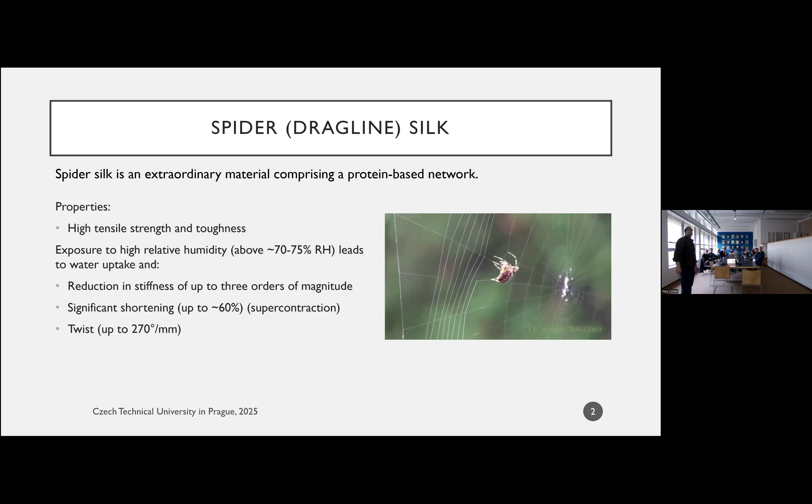Okay, anyways, so these are some experimental results. The supercontraction effect is well known. It's been investigated through and through. This is a paper that I very much like from 2006. What they've done in this work is they took a silk fiber and they measured its stiffness and its supercontraction strain as a function of relative humidity, and they've done that at 3 different temperatures. Let's focus at what happens at 20 degrees C.

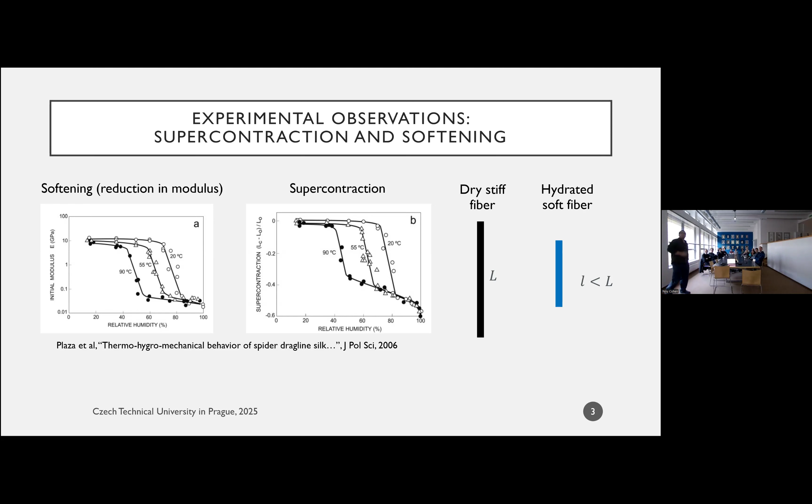So what you can see here is that as long as the ambient environment has a relative humidity of less than 75%, nothing really happens. The stiffness of the fiber is about 10 gigapascals, and the supercontraction strain is, for all intents and purposes, 0. Once I pass the 75% mark, all of a sudden the fiber begins to contract. And it doesn't contract by a little bit, it contracts by about 60%. And if you look at its stiffness, it softens from 10 gigapascals to tens of megapascals, right? So it's a very drastic reduction in stiffness. So that's the supercontraction and the softening.

And there was another paper that came out in 2019, so this is fairly recent. What the researchers did in this work is they took a silk fiber. Again, they came up with a very clever way to measure the twist. We'll talk about this in a little bit. But what you can see here, the red curve is the relative humidity. The blue curve is the twist per unit length.

And again, as long as I'm below about 60, 65, 70% relative humidity, nothing really happens. But once I pass that point, all of a sudden the fiber begins to twist, and it twists by as much as 270 degrees per millimeter. So this is a pretty significant twist. This is the same result for spider silk fiber retrieved from a different spider species. So this happens to different extents, but it happens to most of these silk fibers.

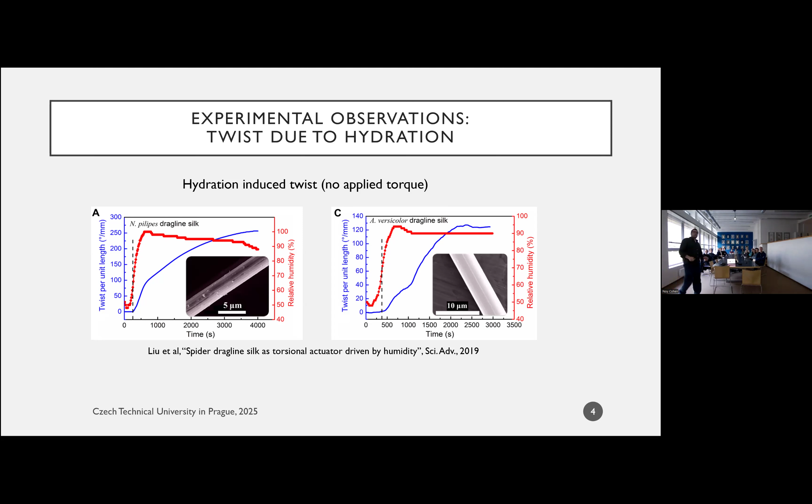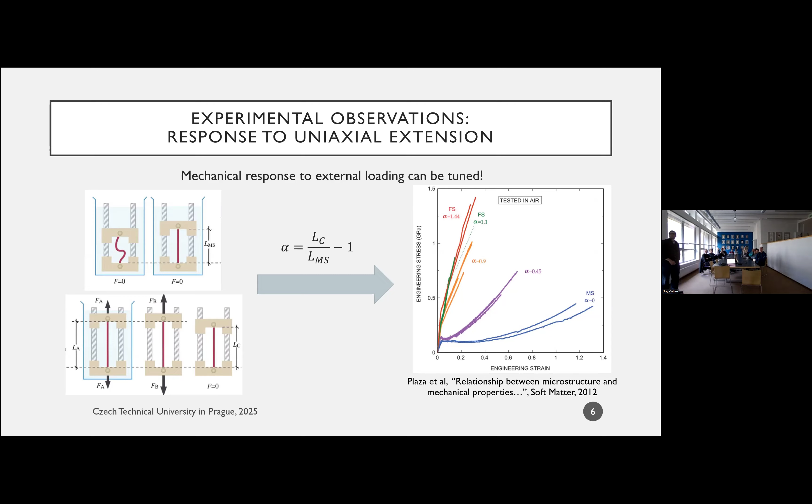Okay, and so when I looked at all of these, I'm a theorist, so we do a lot of theory in my lab. I started thinking about what kind of a microstructure do I need to have? What kind of a microstructure does the spider silk have that can explain all of these phenomena that we're seeing, right? So we're seeing a lot of counterintuitive behaviors. What is it about the microstructure that leads to this?

So if I had just a standard polymer chain and I were to put it on the table, it would immediately contract because it wants to maximize entropy or alternatively minimize free energy. So chains don't want to be stretched. And in addition, in a network, chains never want to be aligned. If there's no preference, if there's no bias, there's no reason for the chains to be aligned. Yet this microstructure still occupies this configuration, which is energetically unfavorable. And so how does this happen?

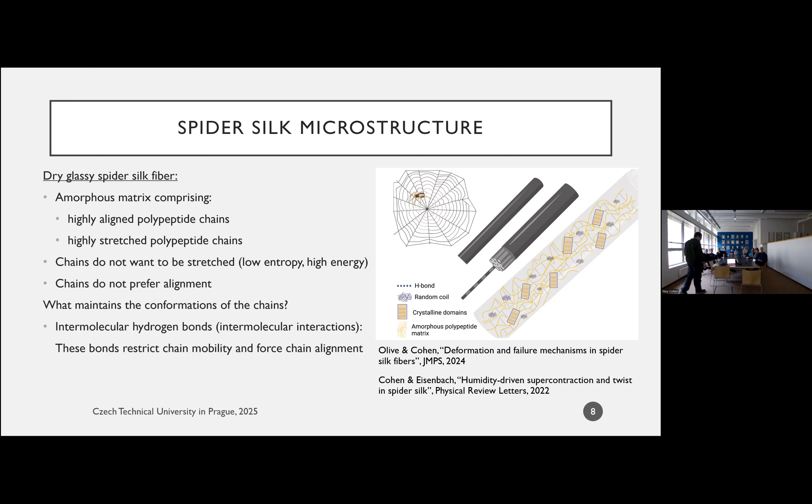Okay. What happens when water diffuses into the network? So when water diffuses into the network, the water interacts with the hydrogen bonds and it can dissociate them, it can break them. So a chain which was initially constrained with these intermolecular bonds throughout, once these bonds break, all of a sudden it's free to explore other conformations in space. It can start wobbling around, right? It can try to maximize its entropy or minimize its energy, right, under the new conditions that it's in.

And so this is kind of a cartoon to illustrate this. So say we have a chain here. Say it's a representative chain inside my silk fiber, and it's interconnected to its neighbors with, in this case, 4 intermolecular hydrogen bonds, right? When water comes in, say I broke this bond here, right? And so now all of this segment here is free to kind of move around. It's free to wobble, to explore other conformations. And because of that, we get the supercontraction effect. Right? Because of that, the chain can now contract. It can shorten, and we start seeing contraction on the macro scale.

In addition, if I remove these constraints, chains are no longer restricted to orientation. They can now explore other orientations in space. They can start moving around and exploring different orientations in space, which means I'm ruining the alignment, right? I'm destroying the alignment. And so ultimately, when I've broken all of the bonds, I'm going to end up with a network that very much resembles a rubbery network with chains that are randomly oriented and uniformly distributed. And all of the chains are essentially random coils. There's nothing that restricts them. They can maximize their entropy in whatever way they want.

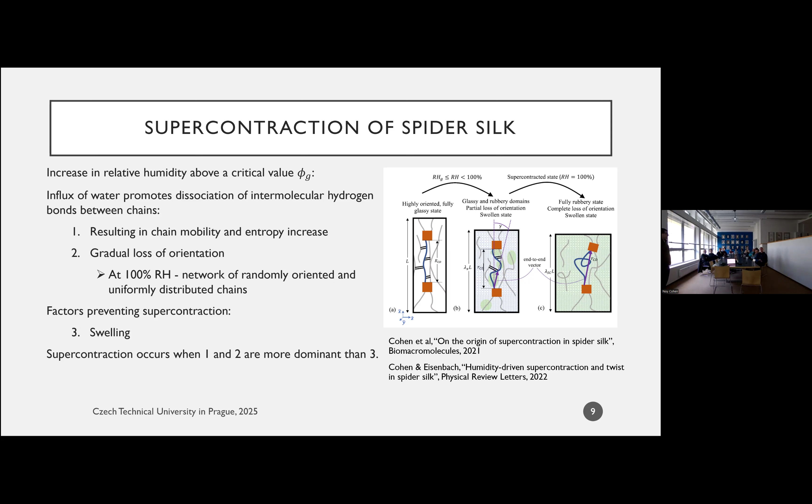Okay. And so after we had this picture in mind, we said, all right, great. For all intents and purposes, this is a polymer, right? It's just made of polypeptide chains, but it's a polymer. And so let's see if we can use the standard polymer theories to capture this effect. And so to do this, well, I'll show you what I've done, but before that, I wasn't really sure how familiar you are with polymer physics.

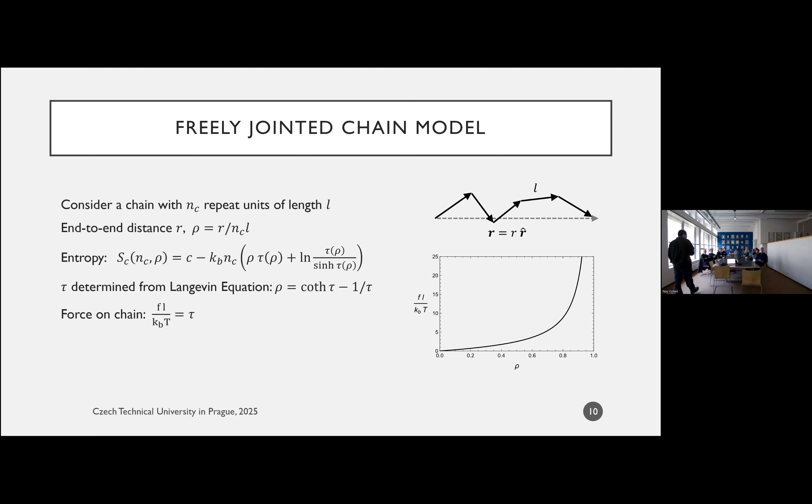And again, this is the same response in rubbers, right? So if you take a rubber, you start stretching it, it's soft. The more you stretch it, the more it stiffens, right? So this is the classical response of rubbers. If we want to use this theory to characterize the response of silk fibers, though, we've got to remember that silk fibers have a very different behavior.

And so silk fibers, if I want to take this and find the analog, have a different microstructure inherently. So they start out in a glassy state. I'm saying glassy in the sense that the chain itself has no conformational freedom. Chains start out as a polypeptide segment that has pretty much no conformational freedom. It can't move around and maximize entropy.

It's fixed. When water diffuses into the network, all of a sudden the chain starts to gain mobility, right? It starts to get these freely jointed segments along the chain that can occupy different conformations. And so the chain can start moving around, and then ultimately, when enough water diffused into the network, I end up with just a random coil, or something that resembles a random coil.

And so, if we want to model this using the classical polymer physics theory, we have to somehow input all of this information into a model. And so that is what we've done. To model the response of an individual chain, let's look at a chain that is initially highly aligned. It interacts with its neighboring chains through, say, capital M intermolecular bonds.

Then we propose a relation that tells me how many bonds the average chain has with its neighboring chains. And that's a function of the relative humidity, and it depends on the strength of the hydrogen bonds, or how much energy I need to break the hydrogen bonds. And from this, I can compute the average number of repeat units, and I can compute the entropy.

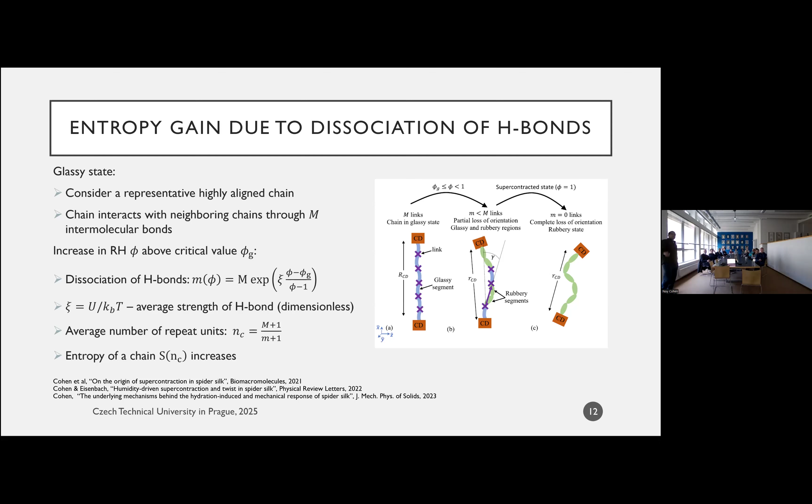Okay, so there's a lot of calculations here that I didn't put in, but it's all in the paper, and I'm happy to talk about that after. So once we have all of this, we can compute the entropy of a chain. We also said that the network is highly aligned, and the alignment gets lost as water diffuses into the network. And so how does that work?

To capture this, we define a parameter we'll call a degree of orientation. This parameter is a function of the relative humidity, such that below some critical relative humidity, chains have no entropic freedom and are pretty much fixed in space, so their orientation is highly aligned. But the more water comes in, the more the chains get disoriented and gain mobility, and the alignment gets lost until we end up with a material that's randomly oriented.

Once we had this, we defined the volume fraction of water molecules. We were able to compute the volumetric deformation, the stress, the stretch of a chain, the fiber stretch, pretty much everything. And then all we had to do was run the calculations and see if this model fits the experimental results. I should also point out, if you take the appropriate limits here, you can come up with an expression for the Young's modulus. So this is the expression that we got. It's long.

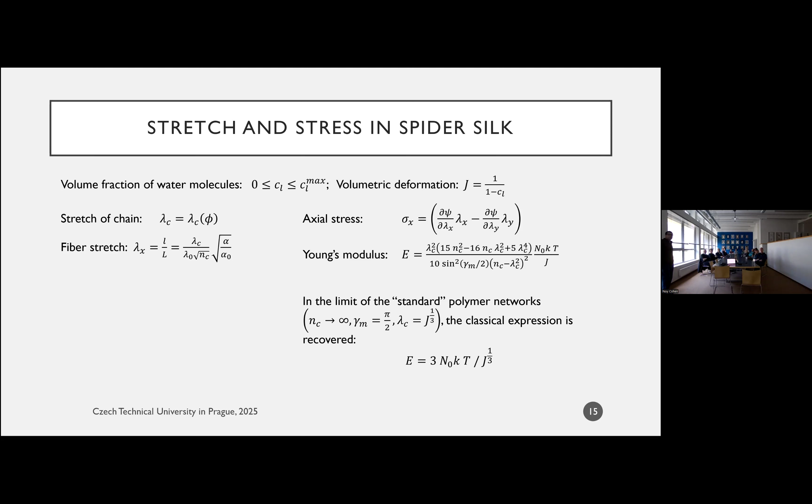But I'll show you it works reasonably well. And I should also point out that again, if you take the appropriate limits here, this recovers the well-known theories of swelling that have been published out there, right? So we're not breaking any math. We were just modifying the existing theories.

And so after we had this, we had all of the necessary information. We could go ahead and start comparing this to experimental findings. And so that's what we've done. So what you see here, this is the supercontraction stretch. This is the stiffness as a function of relative humidity. The dots are the experimental results. The curves are the model. And you can see that the model does a pretty good job at fitting this.

Now, I should also point out, in the model itself, all of the parameters are physically motivated, right? So we don't have the classical fitting parameters. We don't have numbers that we could just kind of throw in there to make it fit. All of the model parameters are grounded in some physical quantity. So for example, in the model itself, I need to input the dissociation energy of a hydrogen bond. Now, people have actually quantified this using MD simulations.

So there was a paper in 2011 that looked at the energetics of hydrogen bonds in peptide groups. And what they found is that the dissociation energy of hydrogen bonds in a peptide group should range somewhere in the area of 5 to 10 kT, right? So this is kind of the limit that we have to play around with. In addition, if you stretch the fiber to failure, you could look at the maximum extension, and based off of that, you can estimate the number of freely jointed segments. So we've done that as well.

The maximum volume fraction of water, that's also a quantity that we can estimate, right? So we had a lot of estimations here to kind of see what these numbers that we plug in need to be. So after we had this, we saw that this worked out pretty well. We compared it to other experimental findings, which I'm not showing here.

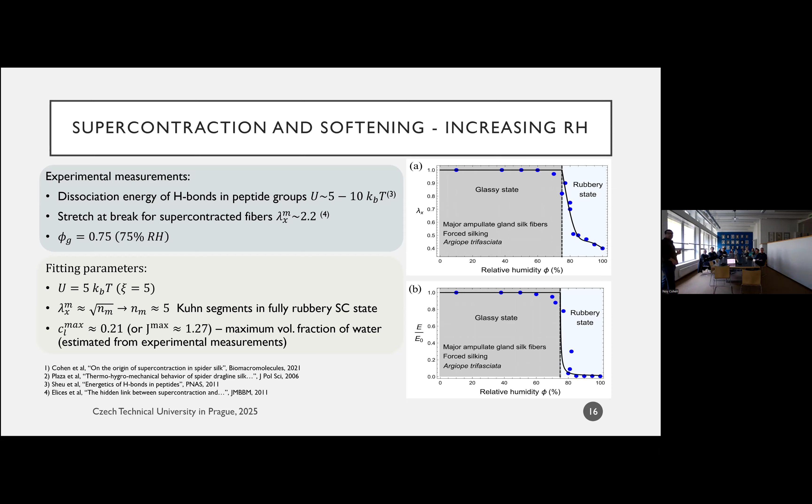So one of the things we said is, if we know that the chain starts out as highly stretched, and as water diffuses into the network, it contracts, let's try to track its contraction. Let's see what the end-to-end distance is. Let's see how much it contracts. And so this is one of the simulations that we ran with the model that we had. And what you see is that as long as you're below the critical relative humidity, pretty much nothing happens. Once you pass the critical relative humidity, the two ends of the chains come closer to each other, right? So the end-to-end distance decreases.

And it turns out that a little above 85% relative humidity, the chain starts to stretch a little bit, right? So this was a bit surprising. And it turns out that the reason why we get this stretching here is due to swelling. So in the classical swelling of gels, if I have a gel and it swells, typically the chains in the gel have to stretch to make room for the water molecules, to accommodate the water molecules that diffuse in.

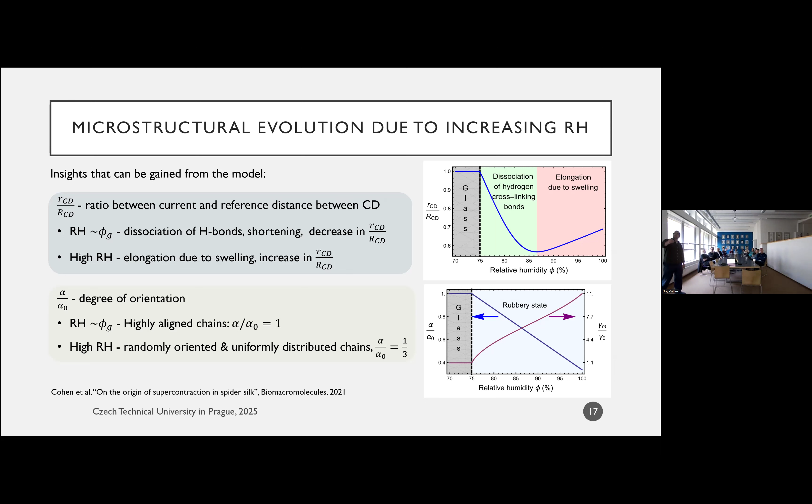In this region here, I don't have to accommodate them because I'm relieving the constraints on the chains, right? And so I get loss of orientation, I get dilation, but the chain itself contracts. Once I get to this point, I've broken most of the intermolecular bonds that restrict the mobility of the chain. And now the chain starts to stretch a little bit to make room for the water. And we also did a very similar analysis with the orientation, and we can measure how the orientation gets lost. Okay, so based off of this, I hope I've convinced you, we kind of understand why supercontraction happens.

So after we published this work, we said, we know that these fibers also twist, right? So why do they twist? Again, this is a counterintuitive response. Keep in mind, I have a system, water diffuses into it, and it starts to twist. Why would this happen, right? So this is not a trivial effect. And so to understand this, again, we started reading and looking at the microstructure of this silk fiber.

And to understand why this happens, after a lot of thought, we decided that it would be wise to distinguish between different length scales to kind of understand the twist response. And so let me show you what we came up with.

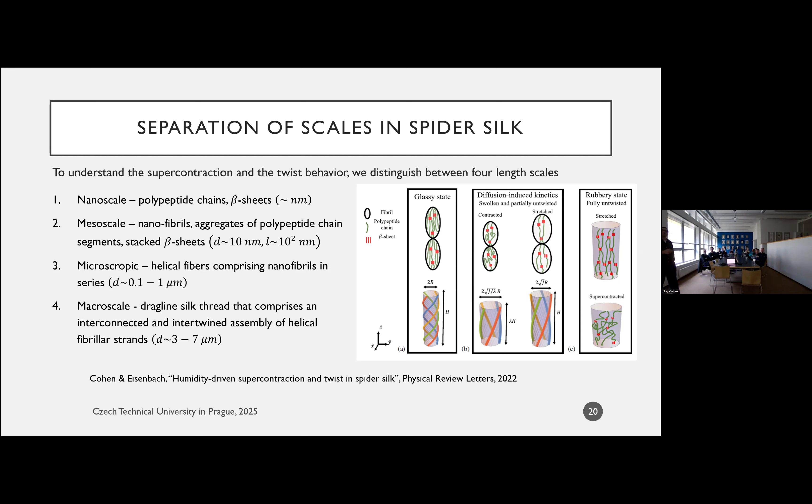Now, in the glassy state, we have these helically intertwined fibrillar strands, and keep in mind, this is not an energetically favorable configuration, right? The fiber itself doesn't want to be in this configuration because there's energy that's required in maintaining this. And so the way this is maintained is again by these intermolecular bonds. These intermolecular bonds are key to understanding what happens here. They kind of fix the whole structure in space.

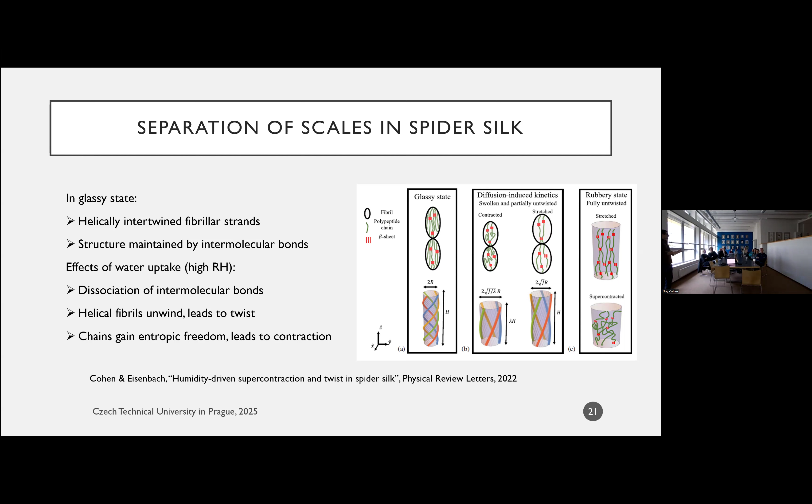Once water diffuses into the network, basically the water dissociates the intermolecular bonds. And once these bonds go, nothing maintains this structure. And so the structure begins to unwind, and that unwinding on the macro scale, we see as twist. And chains get entropic freedom. And the entropic freedom, we see as supercontraction. Right, so these are the two phenomena that we're seeing. So as you can kind of tell, these two happen on different length scales.

So basically, if we're thinking again about these length scales, if I want to understand supercontraction, I can shrink myself down to a nanometer scale. I could sit on one of these polypeptide chains, and I'll see the whole environment around me shrinking, right? Because it's an effect that happens at these scales. So no matter where I am, I'm going to see a contraction of my environment.

However, if I want to see twist, I can't sit on a polypeptide chain. I have to kind of make myself bigger, and I have to look at the helical features. I have to be at an order of magnitude that allows me to see the helical features in the fiber. And only then will I see the surrounding twists.

Okay. And so once we have this understanding, we said, all right, we need to model this somehow, right? We need to quantify this somehow so we can say something. And so the way we model this is by doing the following. This is more of a continuum mechanics-based approach. What we said is let's define three configurations. We'll define a dry glassy state, a hydrated traction-free state, and a hydrated loaded state, right? So these are the three states that I have.

And in each of these states, I'm going to quantify the helical feature, the number of turns that I have per unit length on average, as alpha naught, alpha SC, and alpha, right? So alpha SC is basically alpha supercontraction, or the number of twists that I have per unit length in the supercontracted state.

Now keep in mind, the challenge here is that the traction-free state keeps changing. So this is very similar to problems with growth, right, where you have a traction-free state that keeps changing. And I have to somehow account for the fact that the traction-free state changes, this time not with time, but with hydration.

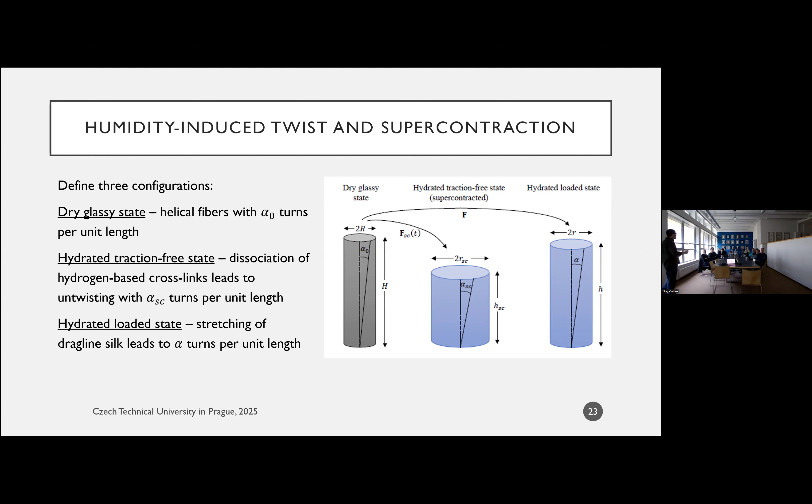And so this is the mapping, right? You can quantify, so this is fairly straightforward. So this is the mapping, the deformation gradient from the glassy state to the traction-free state. This is the mapping from the glassy state to the hydrated loaded state. And once I know the deformation gradients, I can compute the overall deformation gradient from a traction-free state to a loaded state, right? So I can do all of these.

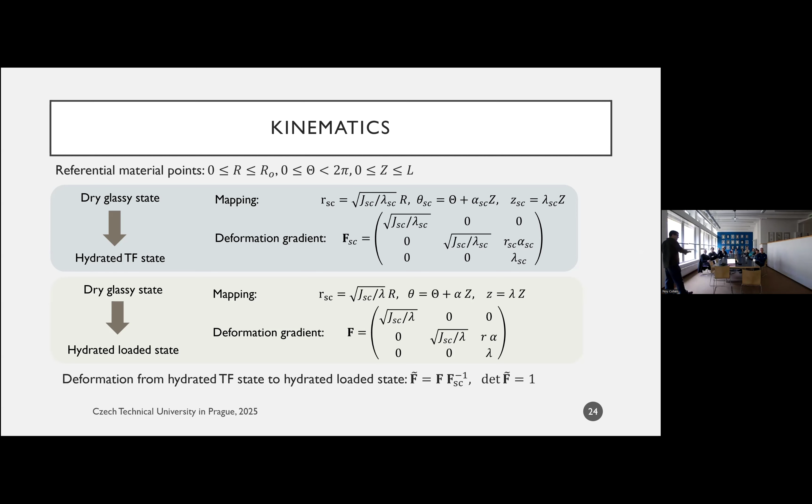And once I have this, if I want to get an expression for the stresses, if I want to be able to solve a boundary value problem, I need a constitutive relation. And so that's the next thing we've done. Now, again, the challenge here goes back to the fact that the traction-free state keeps changing. We have to account for this somehow, right? If I take this fiber and I put it in water, it's going to change its conformation, even though there's no mechanical forces being applied.

In the case of a traction-free setting, where I just take this fiber and I subject it to humidity, then the stretch is just a supercontraction stretch, and the twist is just a supercontraction twist. And if I want to be able to compare this to experimental findings, I need to prescribe relations for lambda SC and alpha SC. And so that's the next thing we went ahead and did.

And so the whole process itself is governed by diffusion. If it's governed by diffusion, the amount of water that I have in the silk network should scale as the square root of t, give or take, right? So the experiments actually support the square root of t. This is kind of a hallmark of diffusion. And so the K here accounts for the diffusion coefficient, the geometry, and all of the diffusion-related parameters.

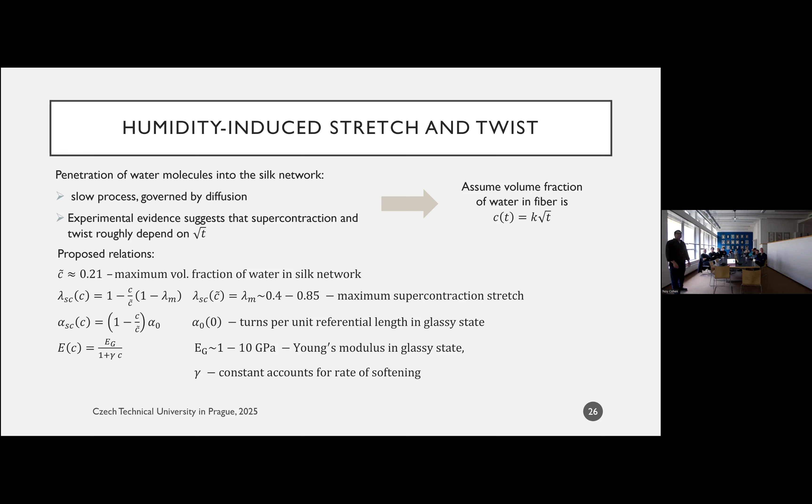And after we had this, we said, okay, so now the supercontraction stretch should look something like this. We assume that it scales linearly with the amount of water in the fiber. The supercontraction twist also scales linearly with the amount of water in the fiber. And the Young's modulus scales inversely proportional to the amount of water. And once we had this in mind, we were able to talk about boundary value problems, right? Now we have everything we need, so we can define a boundary value problem.

So we have this fiber, the fiber is subjected to torsion and a force, or no torsion and no force, or it's subjected to a stretch, right? So whatever we want, we can define it in this way. And we have an expression that relates the force to the stretch, and the torque to the twist, right? IP here is the polar moment of inertia.

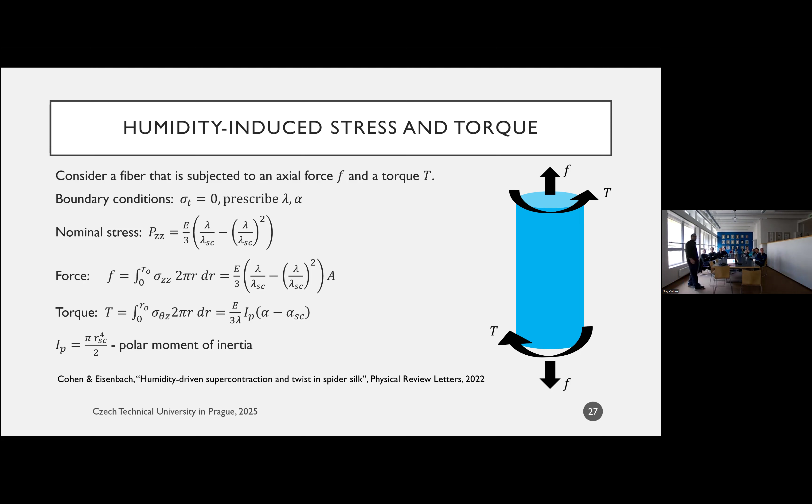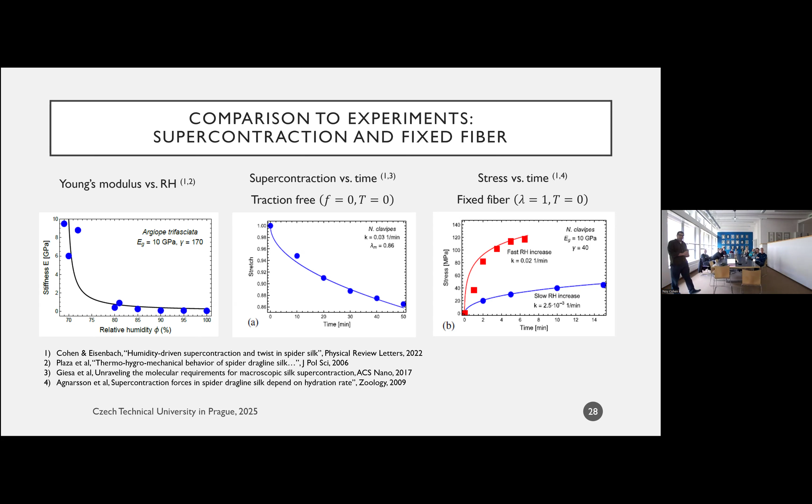But the whole reason we came up with this problem was to characterize the twist. And so the next thing is let's characterize the twist. So before I characterize the twist, I have to tell you how they measure the twist. So keep in mind, this is a fiber. The fiber itself has a diameter of micrometers. So it's not like you can draw a line on it and measure how much it twists, right? It's very difficult to see how to actually measure the fact that the fiber twists, just because of the scale

of the system. And so in 2017, there was a paper that came out with a pretty clever design of how to measure the twist in these fibers. What they've done is they said, I know the fiber is extremely small. It has a very small radius of micrometers. I'm not going to be able to see twist, right? I don't have the scale to see the twist.

And so what they've done is they said, we'll take the fiber, we'll hang a paddle at the bottom, right? So there was a paddle that weighs about 0.1 grams. It's much heavier than the fiber. And what we're going to do is we're going to increase relative humidity, and we're going to measure how much the paddle twists, right? And based off of the twist of the paddle, we'll be able to say how much the fiber twisted. It's a pretty clever setup.

But it does force us to think about the boundary conditions of this problem, right? Because now we have a fiber, the fiber is under a dead load, and we are increasing relative humidity. And so the force is roughly 1 millinewton. The torque is 0. There's no torque that's being applied. And the nominal stress, or the dead weight stress, is something along the range of 10 to 100 megapascals. It really depends on the radius, and different fibers have different radii, right? So it could be 3 micrometers or it could be 7 micrometers. It could be 10, right?

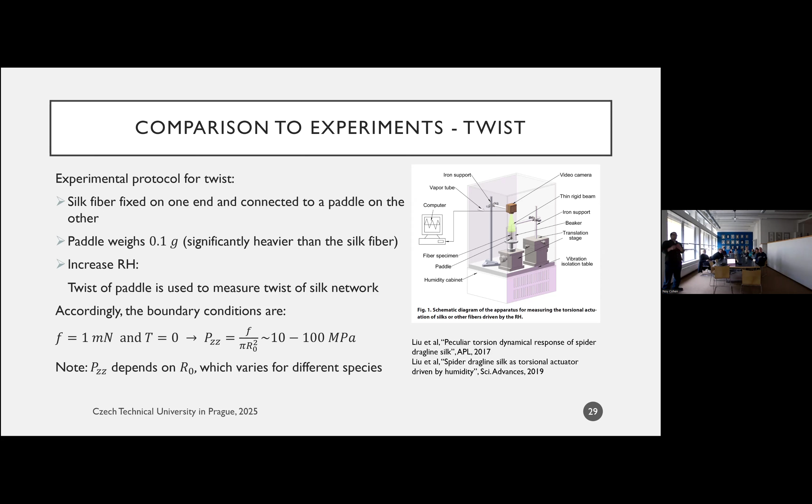And so once we had this, we said, okay, now we understand what's going on. Let's compare. And so we compared it to the experimental findings. What you see here is the twist per unit length as a function of time for the different fibers that we took, right? So these are 2 different fibers. We can see that the model captures the overall trend. This is a bit of a mishap, which I still don't understand why this happens, but overall we fit the trend pretty well.

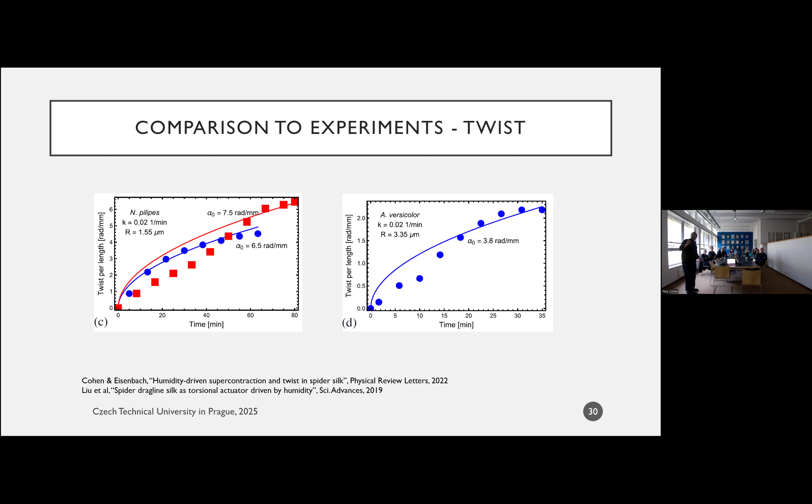And when we submitted this to PRL, we submitted just like this. And then the reviewer asked us, it turns out that the people who conducted the experiments also measured an elongation of the fiber, right? So they had this silk fiber, there was a paddle on it, and it turns out that as the water diffuses into the fiber, we would expect it to supercontract, but it didn't supercontract. It elongated by about 1.5%. And so that forced us to think a little bit: why is it stretching, right?

It shouldn't be stretching. And it turns out that the reason why they measured an elongation is because when water diffuses into the fiber, it wants to supercontract, but it also softens. And there's a weight that's attached to it. And that weight, if the fiber is very stiff, is going to do very little. But if the fiber is very soft, it's going to do a lot, right? And so because of the softening effect, we still end up seeing some sort of a minor extension here.

And so this kind of forced us to think about this. But after we thought about it, we said, let's plug this into the model and see if our model captures this, because we didn't look at the longitudinal elongation until then. And it turns out that our model does a decent job, right? It does capture some sort of an elongation here.

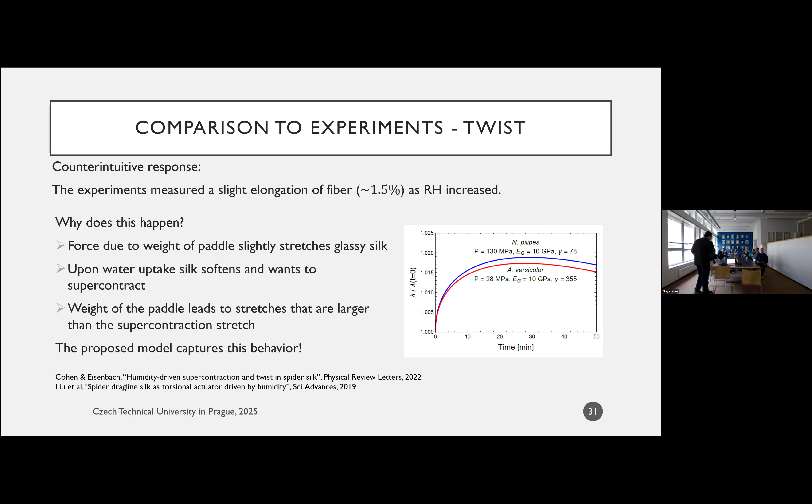You can see here, this is a function of time. We see that the fiber elongates, and the elongation itself is because there is a dead weight, and the softening is much stronger, if you will, than the supercontraction, right? Or the change in stiffness is much more dominant than the supercontraction effect. Okay, so after we had this, we figured, great, now we can understand the twist response.

But still, these silk fibers, if I'm going to talk about fibers, typically I'm going to subject them to uniaxial extension. And in fact, I saw the crane exhibit that you have outside, and all of the cranes that I've seen, they took wires, right? They took strings, ropes, to kind of reinforce the structure. So if I'm going to use fibers, I'm probably going to test them under uniaxial extension. And so if I want to understand the uniaxial extension response here, the first thing I have to do is look at the trends. What's happening? If I take a silk fiber and I stretch it, what does it behave like? What does it look like?

And so it turns out that when you start stretching the fiber, you get what we call an elastic region or a linear region, right? So you stretch it initially, there's a linear regime. After the linear regime, it reaches some sort of a yield stress point, and after the yield stress, there's a plateau, there's like a softening effect. And then after the softening, there's the classical stiffening, right? So it stiffens. This is very typical of glassy polymers. But I would argue that the mechanisms here are different than the glassy polymers. And so the question is, why is it that this is the trend that we're seeing? How do we understand this trend?

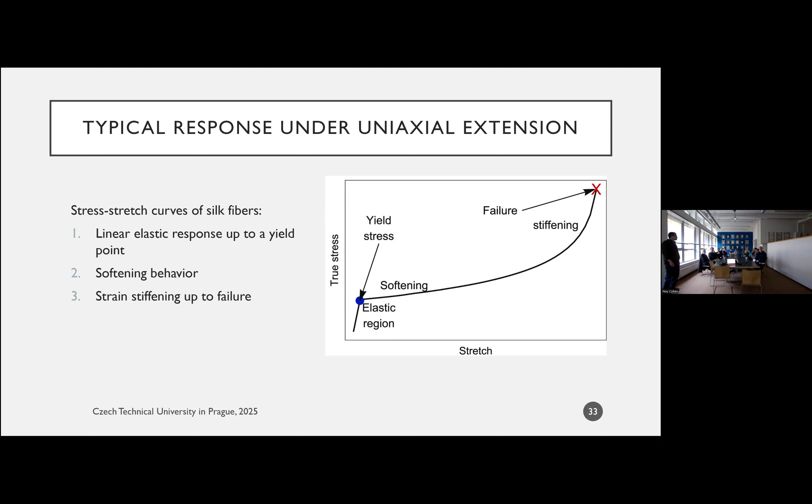So after we have kind of an idea of what the microstructure here looks like, I would argue that when we have this spider silk fiber, and we start stretching it, the initial displacement, the chains have very, very little mobility. Chains cannot give me deformation, they're constrained, right? So there's very little that they can actually do. And so when I start stretching the fiber, the way I get deformation is by the distortion of the intermolecular bond. Or in other words, chains can slide past each other.

So say I have two chains, and then I start stretching on the macro scale, what's going to happen is these two chains are going to slide past each other because they don't have a lot of mobility. They can't really move around and give us deformation. So they slide past each other. But in order to slide past each other, there is a cost. The cost is they have to distort the intermolecular bonds that connect them. So they slide past each other a little bit, and the bonds themselves start to distort, right? So I get a distortion of these bonds.

When I reach the yield stress, what happens is that all of a sudden, all of these bonds have reached the maximum stress they can carry, and then they break. And once these intermolecular bonds break, all of the external load gets transferred to the chains. So this is a pretty weird situation. We have chains that initially feel very little force, right? When I start stretching it, the chains don't feel a lot of force because all of the force is carried by the intermolecular bonds. Once these intermolecular bonds break, all of the external load gets transferred immediately to the chain. And now a chain which was initially under very little force, all of a sudden feels this huge force. Because of this, chains extend, right? So that gives us this kind of softening or jump type effect.

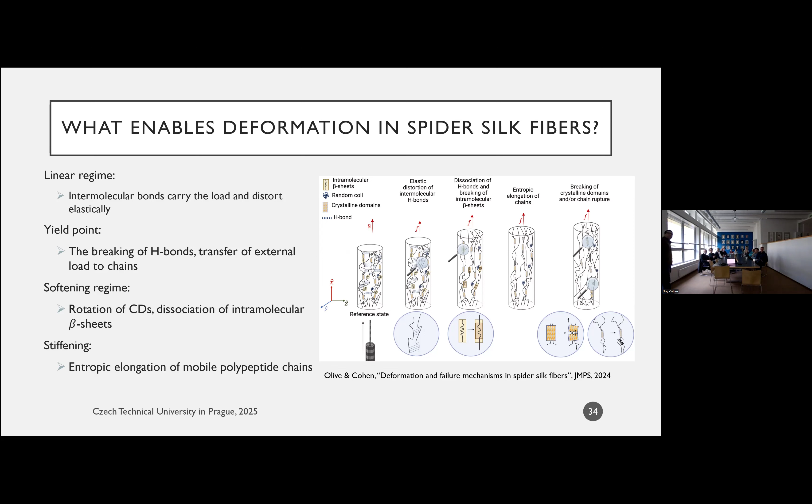I get entropic stiffening, right? What we call entropic stiffening. I stretch the chains and they stiffen, and I have to again fight against entropy. And so once we had this picture in mind, we said, wonderful. Let's try the, okay, sorry.

And so again, I want to remind you of this experiment that we saw in the first slide before I go into how we model this. This is one of the experiments that led me to start thinking about this problem. What people have done here is they found some sort of a post-processing that you could do to a silk fiber. They say if I have a silk fiber, I put it in water, I let it super contract, then I dehydrate it under tension.

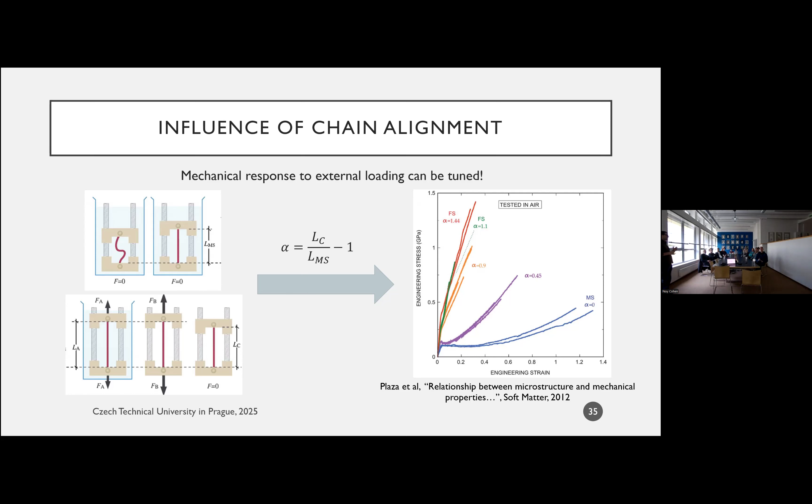And based off of how much I pre-stretch it before I dehydrate it, I can control its properties. So you can see here that I can get fibers with a wide variety of properties. This all comes out from the same fiber, right? It's the same fiber, just a different post-treatment. And so this was the main motivation: let's understand why this happened. And so to model this, the first thing we had to do was to talk about the orientation of the chains.

So essentially, if I have just a silk fiber that the spider gave me, then the chains in this fiber are highly aligned. There's a very distinct ordering of the chains, right? When I put it in water, I break these intermolecular bonds. All of the chains start to gain entropic freedom. They start moving around, they gain mobility, and the order gets lost. And I end up with a structure with chains that are randomly oriented and uniformly distributed.

If I stretch it and then let it dehydrate, what I'm doing is I'm forcing the structure to find its equilibrium. I'm forcing the intermolecular bonds to form in a situation in which the chains are more stretched. So basically, I'm controlling the alignment of the network.

And so to model this, we said, let's define a distribution function. We'll call it rho here, and I'll show you the explicit formulation later on, but this is just as a general sense. We need some sort of an orientation function that relates the angle between a chain and the end-to-end distance, the probability of having a chain at a specific orientation to the fiber direction. And this distribution function also needs to be a function of the process: how much did we pre-stretch while we dehydrated?

And so this is the probability density function. We defined it, and it has to satisfy the state in which if it's completely super contracted, then there's no ordering in the system. The next thing we wanted to do is to model what we call the elastic regime. How does this fiber stretch?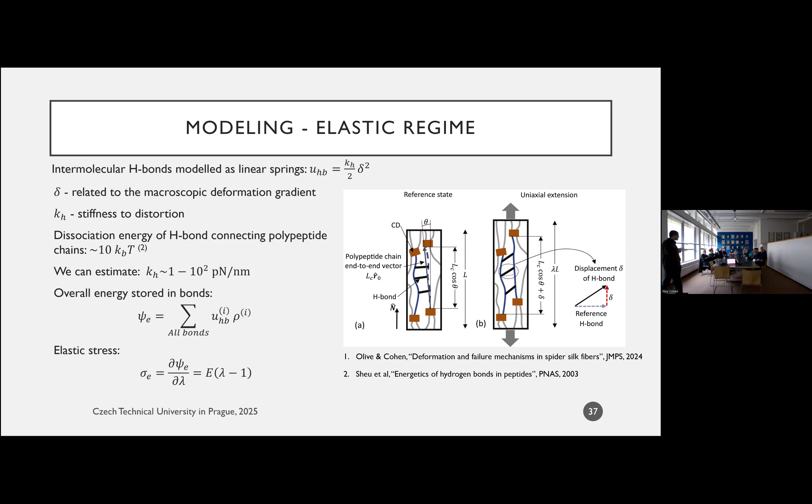After we do this, we can compute the energy of the bonds, and then if we differentiate that, we end up with the elastic stress. So that gives us an idea of what the elastic stress looks like, and tells us something about the elastic regime. To capture the softening and the stiffening regime, we said, okay, so this is the typical chain, right?

The typical chain would look something like this. These are stacked beta sheets. These are crystalline domains that nothing will happen to. They're very, very stiff. So this is not one beta sheet, but they're stacked. It's a very strong structure.

Inside the chain, there's some evidence. There were papers that reported that there are intramolecular beta sheets. So these are structures that are much weaker. It's a beta sheet, but it's kind of like having a string and you rope it around itself and you interconnect them with a very soft bond. And once the intermolecular bonds break, these chains begin to feel a very strong stretch, very strong force. And because of this force, this structure breaks and the chain elongates, right? So we get this elongation.

So if you look at the force displacement curve for a single chain here, it would look something like this. You would have a certain Langevin response or the typical response up to a certain force. At this force, the contour length increases. So you get a jump in the end-to-end distance because the contour length increased. You relieve some of this hidden length. And then you just have entropic stiffening. And so once you do this, again, it's very easy and straightforward to compute the macroscopic response.

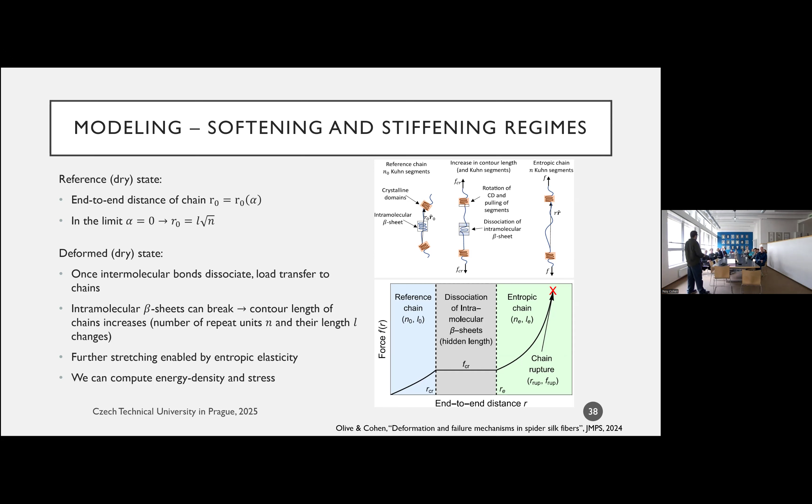And so the way we've done this is we came up with an algorithm. It took a while, right? But it's an algorithm that enables us to track what happens to the individual chains and integrate over the structure in order to get the macroscopic response. And so once we had this, we figured, right, now we have everything. Let's compare to experimental findings to see if this model works.

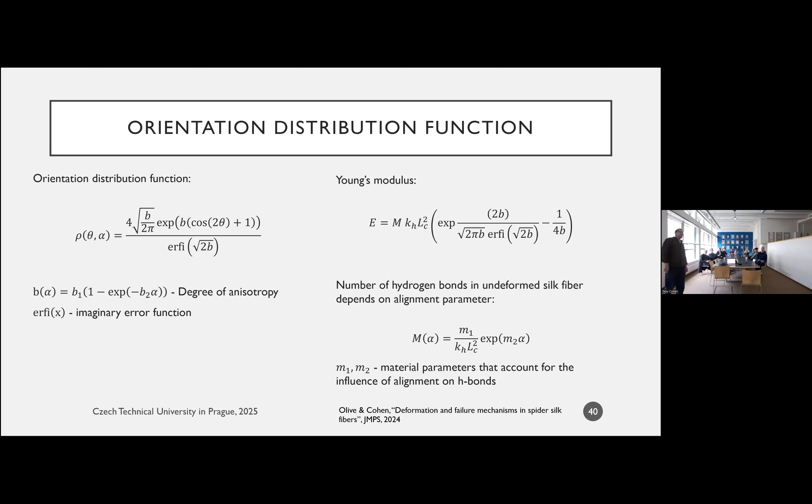Okay, and so before we can actually compare it, this is the orientation distribution function that we took. Run through the math, you can find out that this is what the Young's modulus looks like. This is what we assume would be the dependence of the number of intermolecular bonds as a function of the alignment parameter. And once we had all of these, we said that's perfect. Let's compare. So what you see here is the stiffness as a function of the alignment parameter, right? This is the stiffness for a fiber that's super contracted.

So if I have a fiber, I put it in water, I take it out, I let it dry without applying any force. I stretch it, I measure its stiffness. This is its stiffness. Keep in mind, in this state, the microstructure of the fiber is just randomly oriented. There's no orientation in the fiber itself, right? So it's randomly oriented, and that is why it's relatively soft. Again, this is in gigapascals.

If I take this fiber in water and then I stretch it and I let it dehydrate under tension, now I've forced a certain ordering in the material, which means that once it's completely dry, I expect to have a fiber that's much stiffer. And it turns out that it is much stiffer, right? So these different curves are for different spider species. I'm never going to be able to say the names of these, so I'm not even trying. But you can see our model works pretty well with all of them, so we can understand what happens to the different fibers.

In addition, what I'm plotting here is the number of intermolecular bonds that formed between chains as a function of the alignment parameter. And what I'm arguing is that the more I pre-stretch the material and let it dehydrate under tension, the more bonds are going to form, because I need more agents or bonds to counteract the entropic effects.

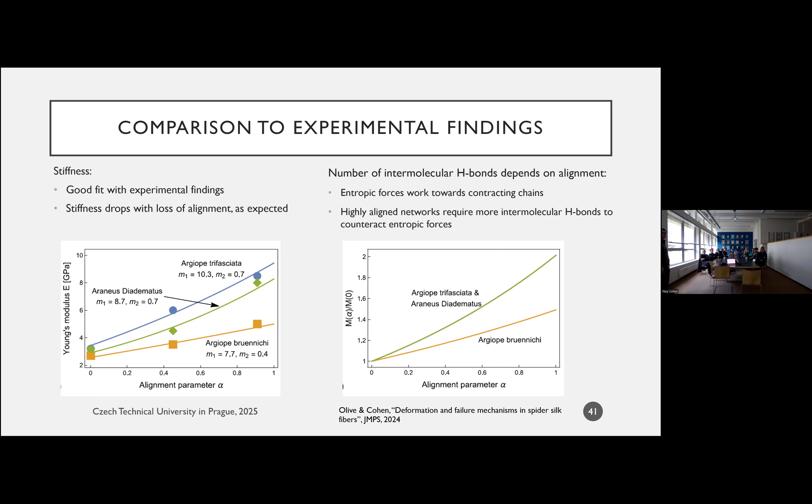So as you can see, the model does a pretty good job at capturing the trends and the overall behaviors that we get. And so when we had this, we were pretty happy. We said, all right, that's pretty good for us.

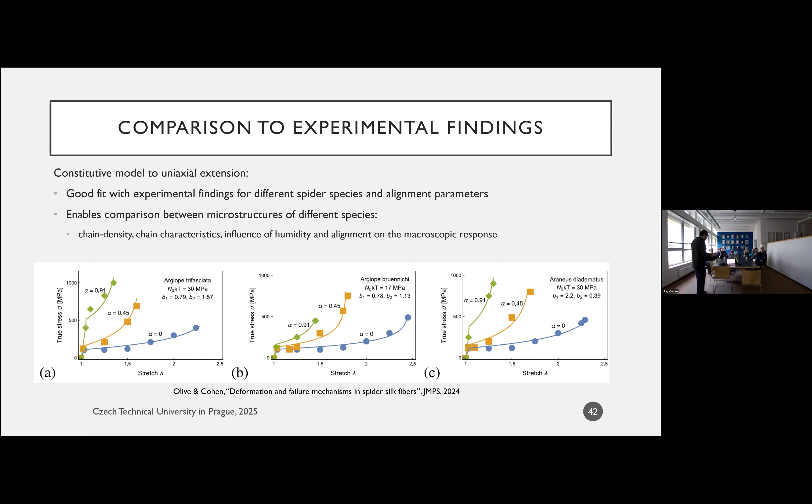So I want to conclude with this, and then I have a few more minutes that I want to show something else. And so basically, what I've showed you is that we developed microscopically motivated models to understand the behavior of spider silk. Additional work that we're doing is to understand hysteresis in these fibers, and other types of effects that happen in this very interesting material.

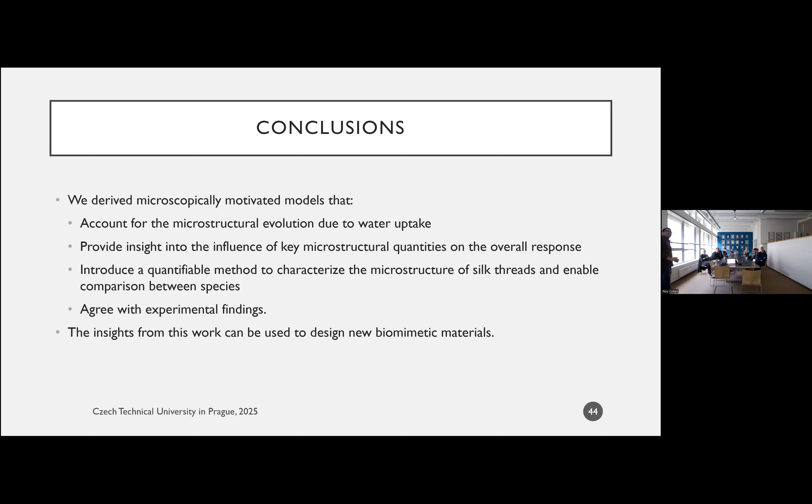All right. So one more thing I wanted to show you, just a few more minutes and then I'm done. I wanted to talk about a few other projects that are going on in my lab. So I'll start with the first one.

Okay, so we talked a lot about twist, and this goes back to 2019, I had a postdoc and we started thinking about twist. So if you look at the literature, I haven't found a lot of papers on torsion. Usually when people want to characterize materials, they do either uniaxial extension, biaxial extension, pure shear. Not a lot of torsion out there.

But the ones that do report torsion typically say, I have a structure, I apply a torque to it, and in response it twists. Or if I get twist in a different way, like in spider silk, I need to have some either chirality or some sort of an inherent anisotropy in the material.

And we started thinking, would we be able to get a structure that twists in response to not a torque, but in response to a non-torque loading? So it could be inflation, it could be extension, anything else. But just using isotropic constituents. So I want to take isotropic constituents and construct them in a way that gives me a twist in response to, say, inflation is what I'll show here. But you can also do it in response to other mechanisms.

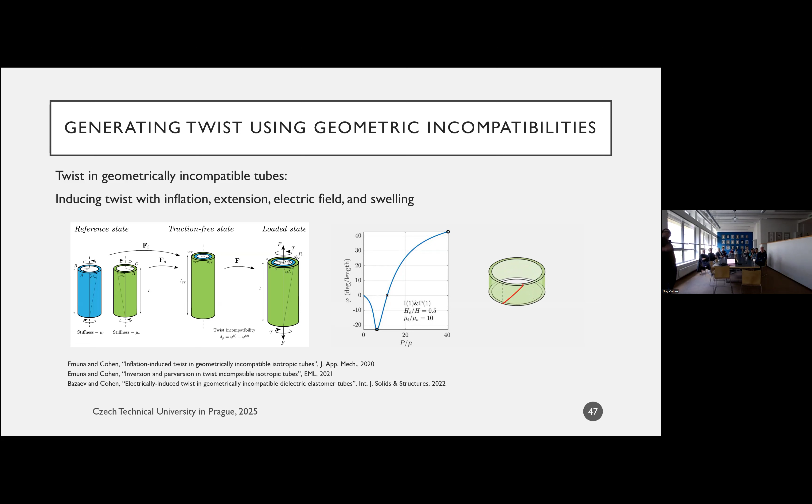This is very strange. And if I keep inflating it, all of a sudden it rotates completely, and now it turns in a different direction from the beginning. Now it rotates clockwise. These points are called inversion and perversion, and this is a fascinating phenomenon that happens due to the nonlinear effects of these materials, due to the stiffening effects. So we published some works on this, which was a very exciting project.

The second thing we did has to do with shape morphing structures. So this is, again, just a teaser, and I'm happy to talk about this later.

But typically today, when we talk about shape morphing, we're talking about having a structure that morphs from one state to another. So say I have a plane that deforms into a dome in response to thermal excitation or electric field or hydration or whatever. We started thinking, would it be possible to come up with a design that takes me from configuration A to configuration B to a completely different configuration C in response to the same stimulus?

So for example, if we think of thermal, which is what we've done here, say I have some sort of a structure, it starts out as a plane, I heat it up, it deforms into a dome, I keep heating it, it deforms into some sort of a wavy surface. So I completely changed the topology. Is this possible? Because it's very interesting. And we started playing around with this, and this is what we came up with.

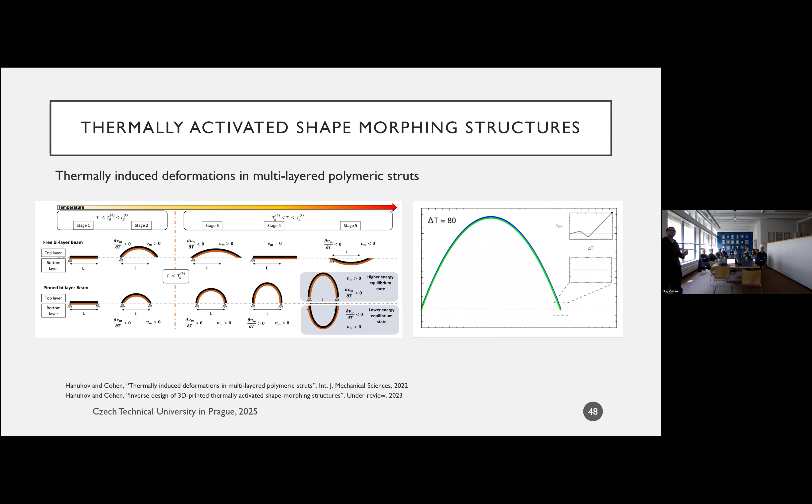So what you see here is, again, this bilayer beam. It initially bends upwards, then it bends downwards, and then it bends upwards again. Every time you see a change in the direction, that's an effect of the glass transition. It happens because the ratio between the thermomechanical properties changed.

After we had this, we came up with a theory based on moderate rotations theory, which is kind of like von Karman, but for beams. And we 3D printed struts and validated our theory. And we came up with this very kind of silly illustration that I like to show of a triangle that deforms into kind of a fish shape. We tried to realize this. We're very limited with the materials that we have in my printer.